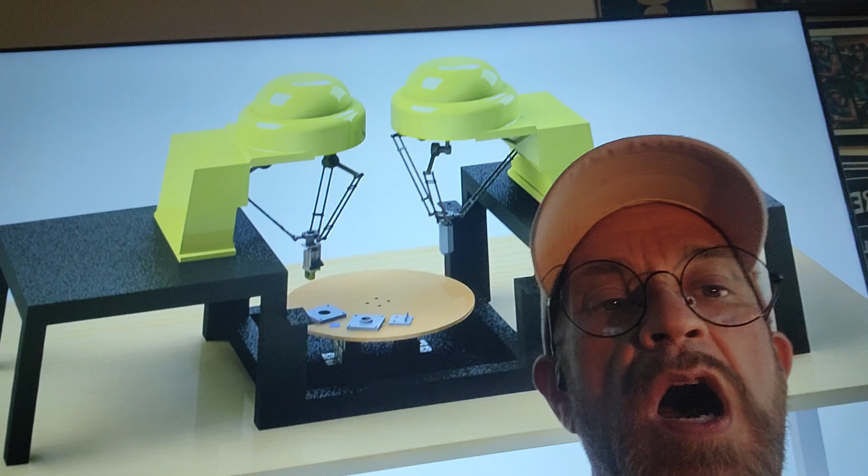So first, I'm going to give you guys some shots of what we had, what we ended up with, and then I'll give you some real life images of where we are with the real project as we speak, here a week away from turning it in, and then I'll give you the numbers breakdown.

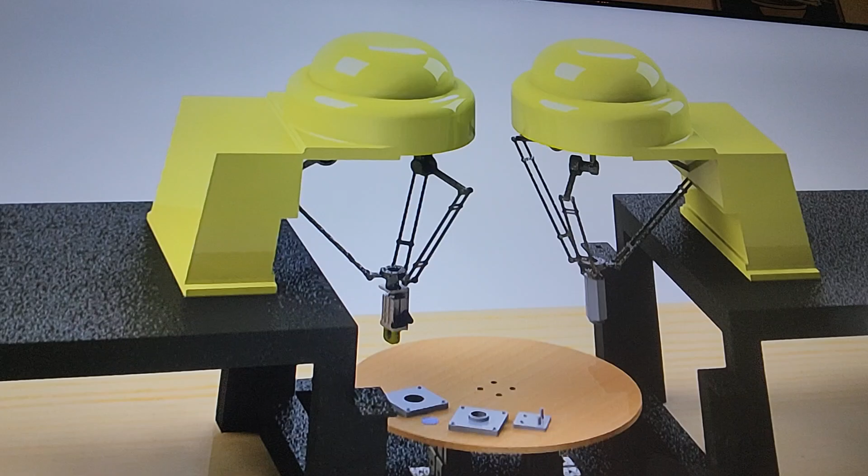So yeah, here we have it. I've got the two FANUC robots. This is just the general overview. They're facing each other. One of them has a gripper arm on it, and the other one has got a vacuum arm on it. I don't have any of the connectors shown here, of course. That would be way beyond the scope of this rendering. Underneath there, we have the turntable, the Lazy Susan that rotates around. Those are the parts on top of it.

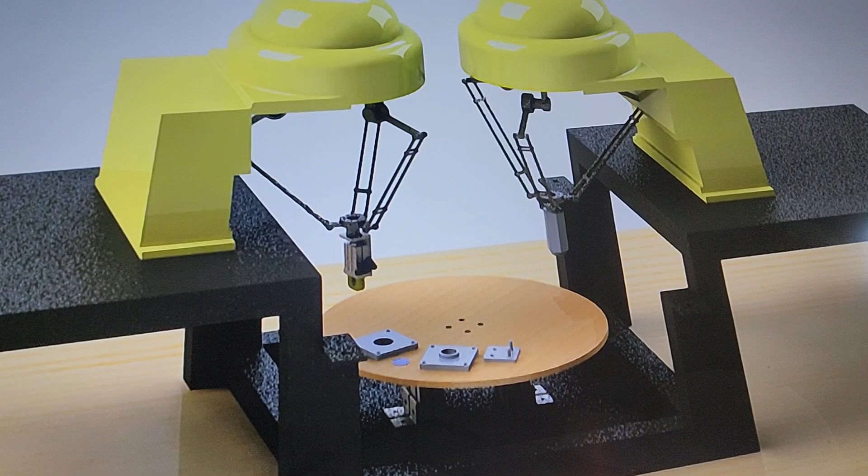Well, let me just kind of start zooming in and I'll take you through it. Let's see, I'm kind of trying to rig up. I've got a video in here, so I'm trying to rig it up. Let's see. There we go. Yeah, here's a shot of that turntable. This rotates back and forth, and that vacuum arm, the vacuum gripper there, picks up the pieces and sets them.

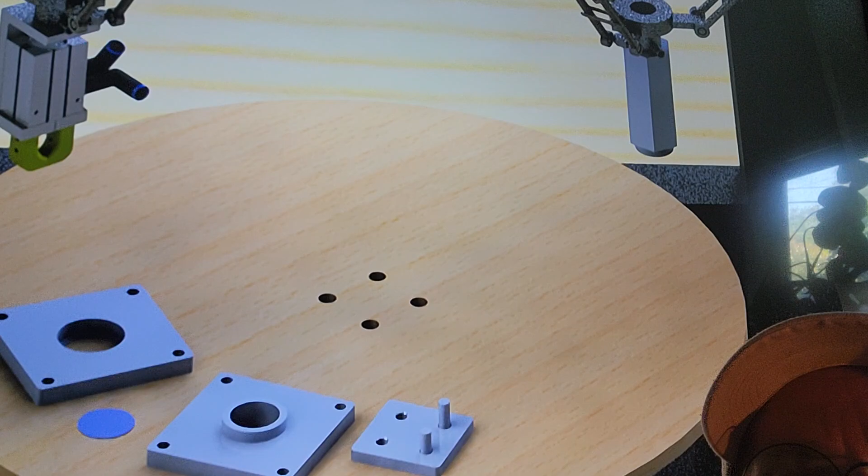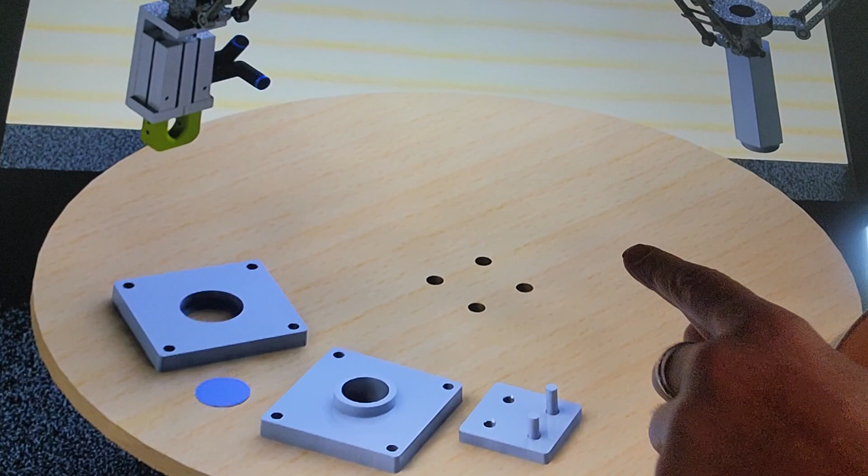There's a bottom piece, and then the membrane sets in between them. This one here actually is usually flipped around. So the bottom piece, membrane, top piece. This right here is just a magazine that this piece, the gripper arm, will come over and grab these dowels and press fit them through. So the vacuum assembles, the gripper presses through the dowels. Of course, those are both pneumatic tools, so in the real life setting, we had to design the schematics and

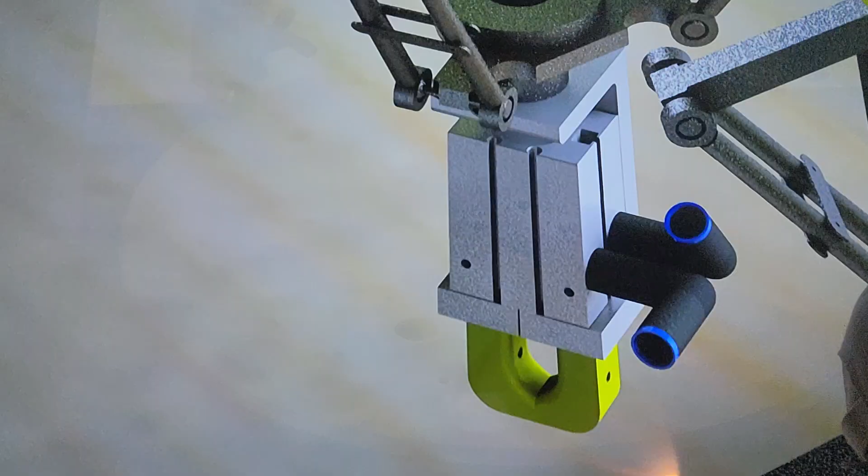set up a bunch of pneumatics for it and everything like that. But we'll go through it. Let's see if I can get this running again. So fast forward. Here's a close-up of that pneumatic gripper arm. Again, this is all stuff that challenges we faced in real life. When we were first given this gripper arm in real life, it did not have these grippers, and it did not have a bracket or any way to mount it to this robot.

It was just a little chunk of pneumatics with these hoses sticking out of it. So true story, I used my rudimentary SolidWorks knowledge way back at the beginning of our course and designed those gripper arms and had them 3D printed and implemented here in the capstone. There's 4 or 5, maybe 6 pieces that I actually designed as part of the SolidWorks course that did get incorporated into our capstone that we wouldn't have been able to do the capstone without my SolidWorks knowledge. If I'm being honest with you, we would have muddled through it, I'm sure.

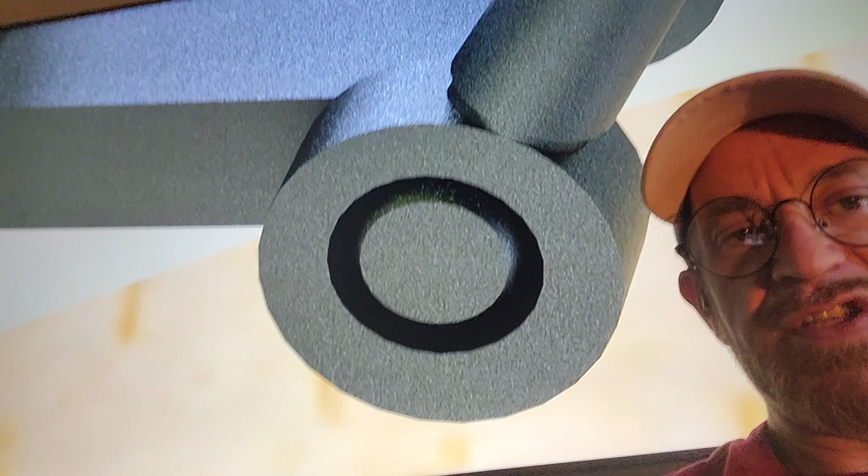Okay, this is a particular challenge. This is a bracket. I should have shown you a better shot of those robot arms, which I'll show you later. But keep in mind that the robot arms, the armature is all connected in real life with these kind of spheres that are sheared off at one end. So there's a sphere and then another kind of hollowed out sphere around it. And in real life, these joints have a ton of lateral motion because it's sphere on sphere.

I tried to simulate that. I got the geometry at one point, even though it was a bit of a pain. The geometry is not correct for that in this. We do have the sphere on the inner one, but the outer one is just a regular cylinder and not a sphere. But even when I did get it to be a sphere temporarily, the mating is just too complex.

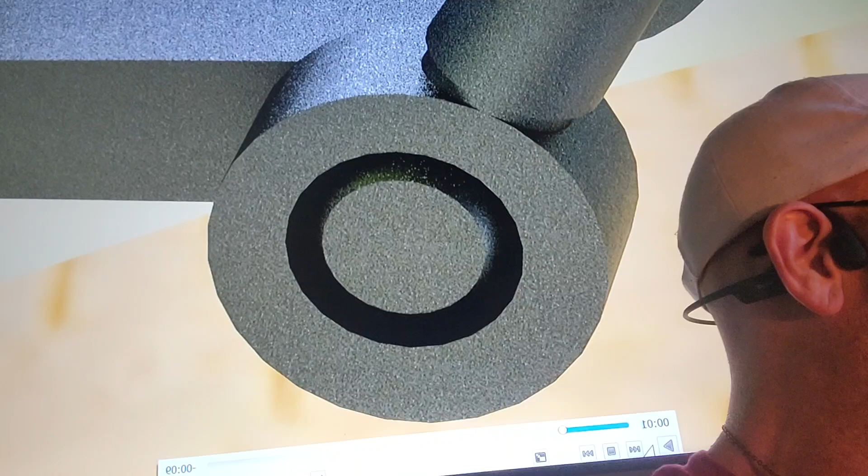I'm sure somebody who's a lot better, but I just didn't have the time. So it functions, and you'll see in my video that the arms are all mated and do go up and down, but this kind of real life lateral motion I just wasn't able to obtain because the mating was just beyond the scope of my knowledge.

Here's a shot of the vacuum cup that we designed and built and is now currently sitting on a real life robot sucking air. Moving on.

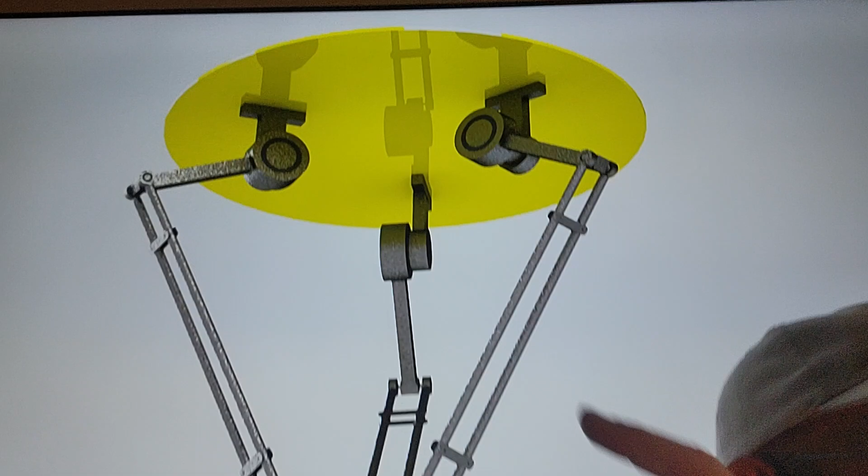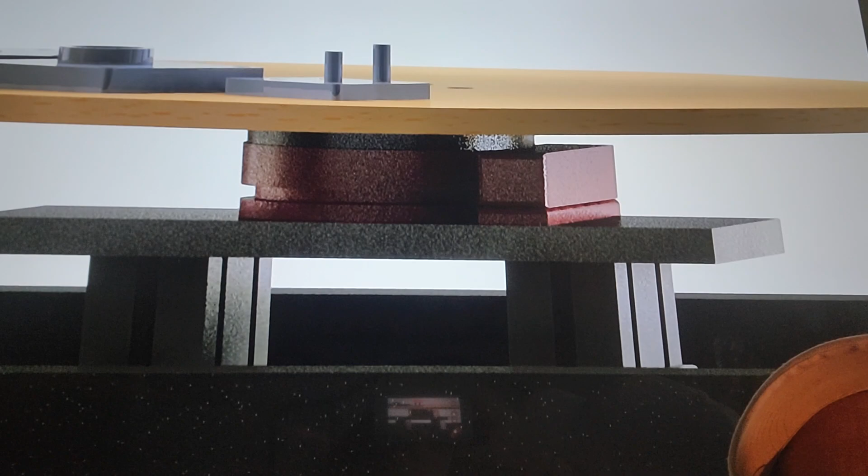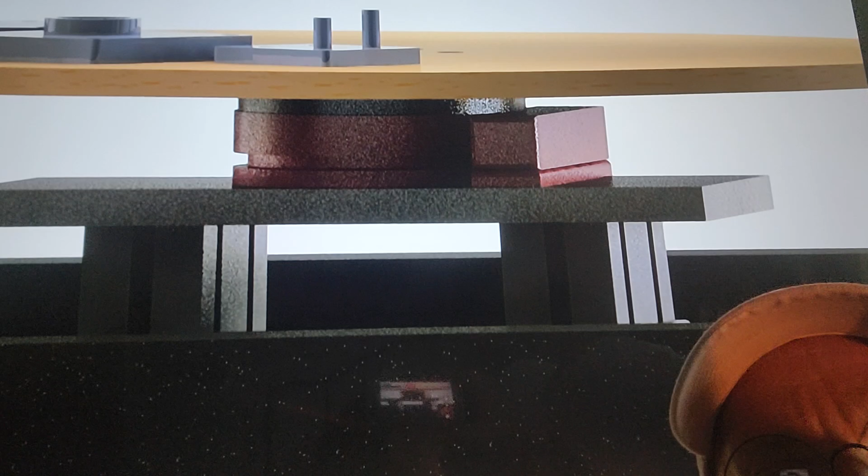That's connected to a rotating piece here. The black part is the one that actually rotates, while the red stays still, and the black part is screwed into the table. There's a stepper motor, not modeled here, but in real life connected to the back of that worm drive, which connects to a PLC that causes it to rotate. You'll see an image of the PLC at the end. That strut from my first presentation was quite large and geometrically complex, so we needed it lowered 3 inches and broke down some of that geometry to make it smaller.

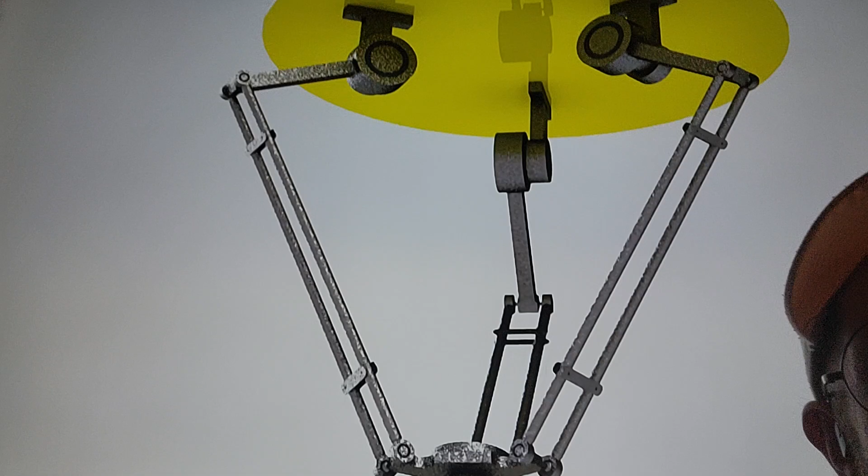Here is the final gripper arms armature setup. As you can see, it all went together quite well. There were bushings and things needed to make it all work. It goes up and down, and you'll see a video of that in a minute. The kind of magic that this FANUC actually does in real life won't happen with this model. Here's another shot, further away, of the arms.

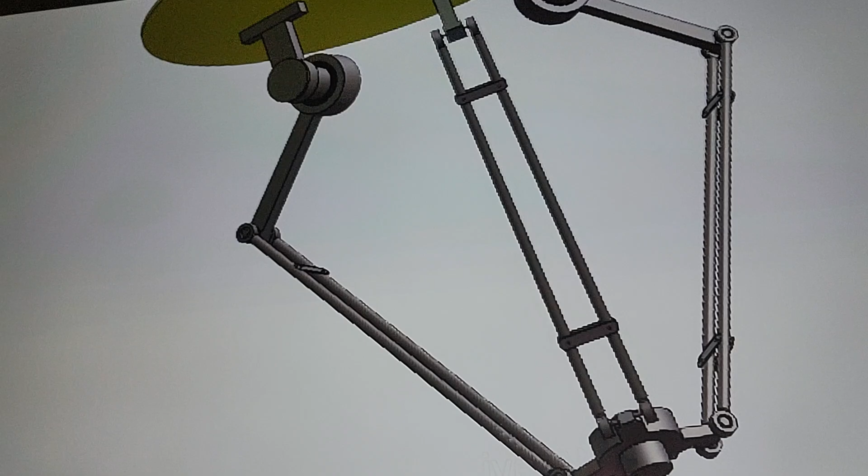Here we go. You can see it go down, then stretch, then back up. They all do that.

This is a shot of the final assembly. I can make this table rotate. I can make the end-of-arm tools here rotate around, and I could have made videos showing that.

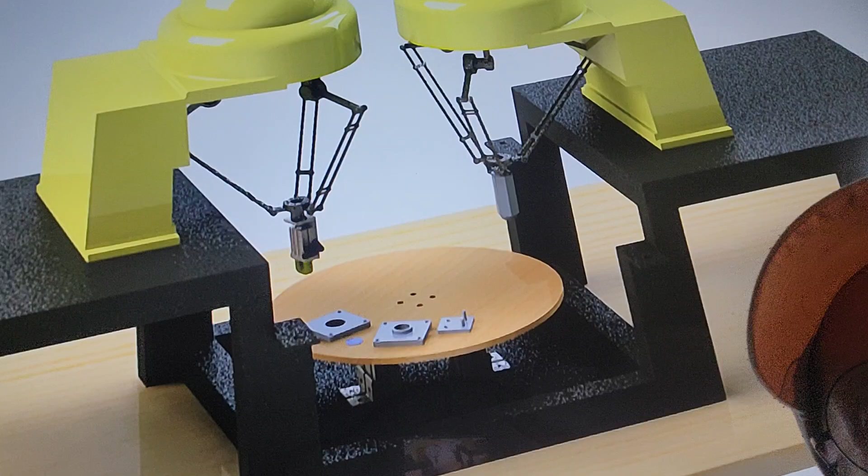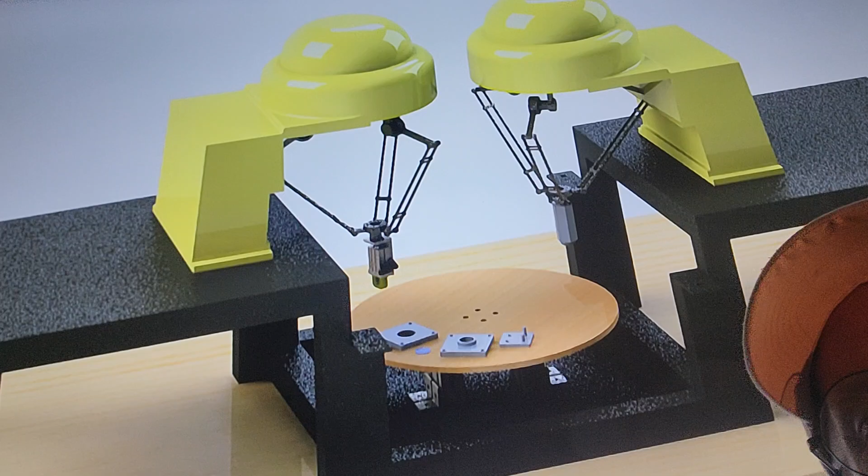But to be honest, at the end of the day, there are 90 components in this overall setup, and my computer—I did this whole thing on a little 5-year-old Dell 2-in-1—has kind of reached its peak when I have the full thing up and showing like this. It doesn't like it. So next, this is what it actually looks like in real life. Your eyes got nice and used to that beautiful silicon digital world.

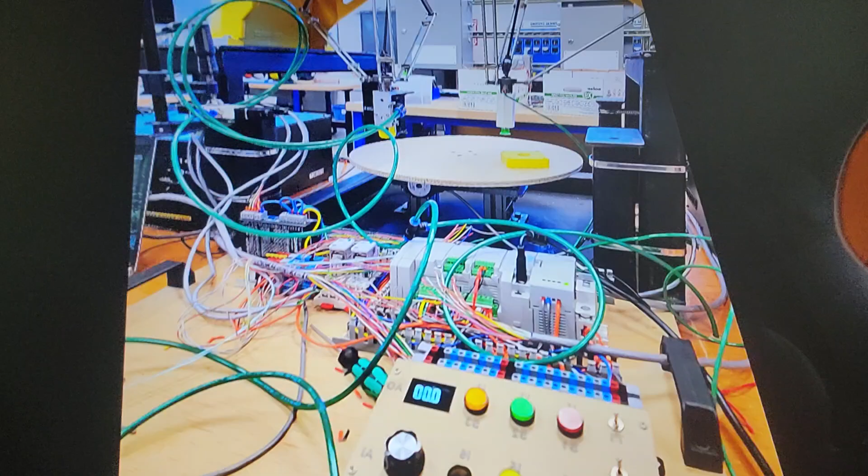Now guys, this is due in less than a week. It currently does not do what it's supposed to be doing. We blew two fuses this morning, and we couldn't proceed with the project until those fuses show up, which they're being sent to us, hopefully on Monday. But we gotta do what we gotta do. The project's got to run on Thursday. That thing is going to be up and running, come hell or high water. We'll make it happen, but that's what life is like here when we live on the edge.

Oh gosh, I haven't even gotten to the breakdown yet. This video's running long, sorry about that guys. Okay, breakdown time. Oh, it's totally backwards. Well, I'll just have to kind of explain it to you then. I've got a paper format of it, but I'm recording this with my face cam.

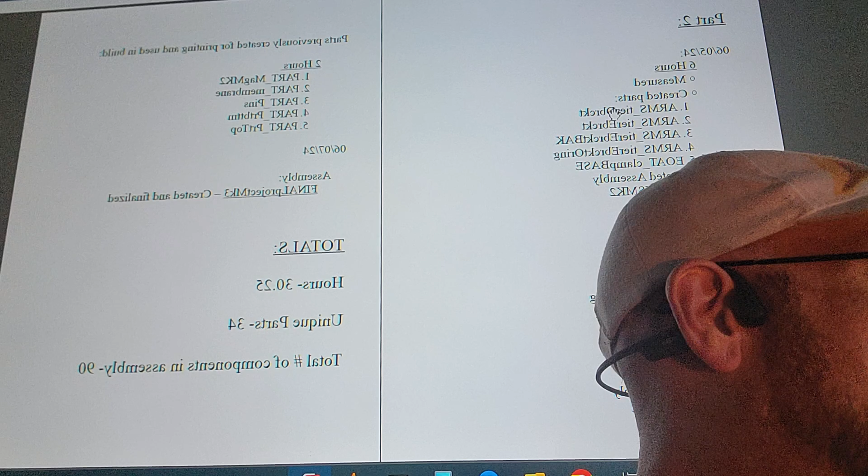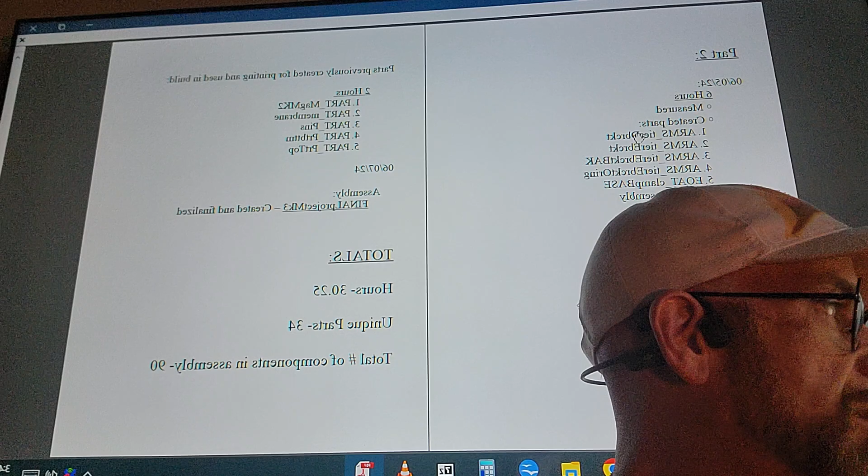So I'll just tell you: on 6.5, I had 6 hours, and I generated 5 parts and an assembly. On 6.6, I had 5 hours—oh, this's gotta be so annoying to look at backwards—on 6.6, I had 5 hours and generated 7 more parts. I had previously generated 5 parts that we used in the model, and I credited myself 2 hours for that. On 6.7, I finalized the project.

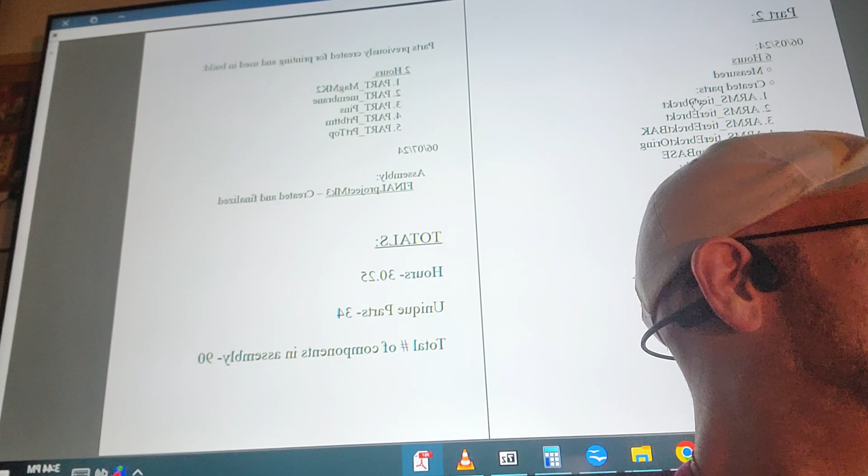But the important numbers here, in reverse: total number of hours obtained, 30.25 hours. Total number of unique parts generated, 34 parts. And total number of components in that final assembly I showed you guys was 90 components.

So yeah, again, sorry about that reverse. I should have thought better about how the selfie cam reverses things. But yeah, said and done. Tired as hell, don't mind telling you.

And in real life, we've actually got to make that thing work. So I could use some thoughts, I could use some prayers. Whatever gods you believe in, please have them look at me next Thursday and smile. Okay, thanks so much.